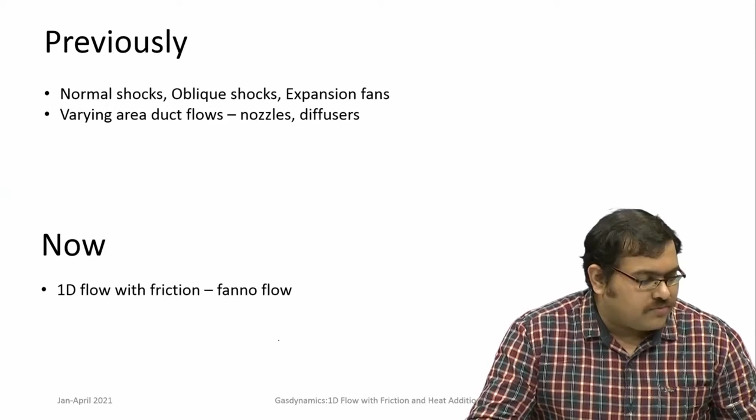Examples of these kinds of flows can be compressible flow through pipes, gaseous flows through pipes, and this analysis of the flow was done by Fanno, and it is also named Fanno flow. So 1D flow with friction, or Fanno flow. So what we are looking at is a constant area duct.

So first we would look at the thermodynamics of this process, and then we will move on to the flow equations and so on, and these are well described in very many textbooks of gas dynamics. So several thermodynamic charts and such figures will be taken directly from such textbooks.

Here we look at steady flow in constant area ducts. So A is constant, and we are considering flow friction due to viscous forces at the walls, and there is no heat transfer, so the flow is adiabatic. So 1D flow, uniform flow properties, that is the quasi 1D assumption, and the flow is adiabatic and steady. So friction always occurs in the opposite direction of the flow, it opposes the flow, and this is occurring along the wall.

So if you consider a pipe with circular cross section, the force of friction would occur on the lateral surface area. So for a small element dx, or it can be a typical length L, the lateral surface area is pi d multiplied by dx, and if the shear stress on the wall is tau w, then the force is tau w multiplied by pi d dx. So this force acts in the direction opposite to the flow.

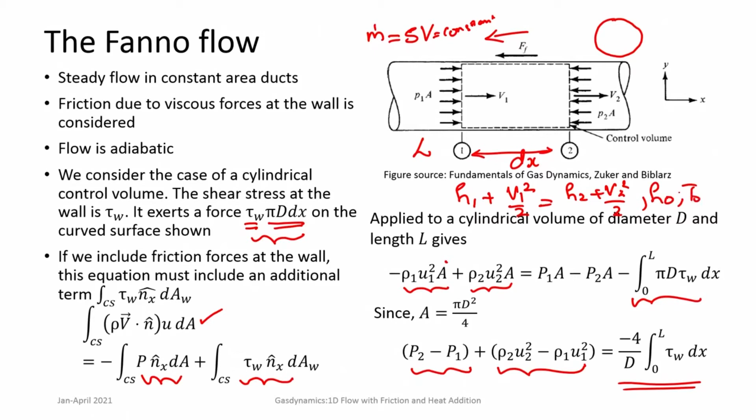So the major change that happens is in the momentum equation. What about the energy conservation equation? There is no heat transfer occurring over here. So if you take H1 plus V1 square by 2 is equal to H2 plus V2 square by 2, it essentially says total enthalpy or total temperature remains constant. So for Fanno flow, first what we shall do is look at the thermodynamic description of Fanno flow as a process and see what we can learn from this description.

In fact, almost all aspects of Fanno flow will be covered just by means of one single curve, which is the Fanno curve. How do we get to this curve? You consider two equations: the mass flux, rho v, is constant, and it is given a parameter g. This parameter g will come again and again in the descriptions. The other one is total enthalpy, h plus V square by 2, is a constant. So total enthalpy is a constant.

Given rho v equal to g, we can express v equal to g by rho, and this can be substituted in the energy equation, and we get h plus g square by 2 rho square is a constant. If you take this particular equation, it consists of only thermodynamic variables, along with the ideal gas equation of state and so on. If we plot all possible states beginning from an initial point which satisfies these conditions, such a curve is a Fanno curve.

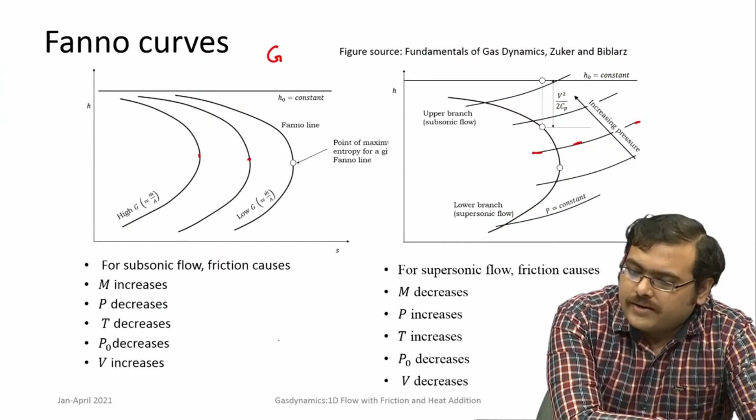And if you draw the pressure lines along the supersonic branch, then you will find that pressure will increase, and the corresponding height over here is essentially V squared by 2. So from that you are able to understand that in subsonic flow velocity actually increases in a Fanno flow as the flow goes through a long duct with friction, while in supersonic flow, if the initial velocity entering the duct is supersonic, the velocity decreases.

Okay. Now this is an adiabatic flow. So for adiabatic flow, H naught is constant, or T naught is constant. Also the other value that is constant is T star, that is the temperature at which it reaches Mach number equal to 1. So even T star is a constant. This particular point corresponds to T star, but please do not confuse it with isentropic flows. This is a flow in which there is friction. Friction always introduces entropy, that is why you see that entropy always increases and it reaches a maximum.

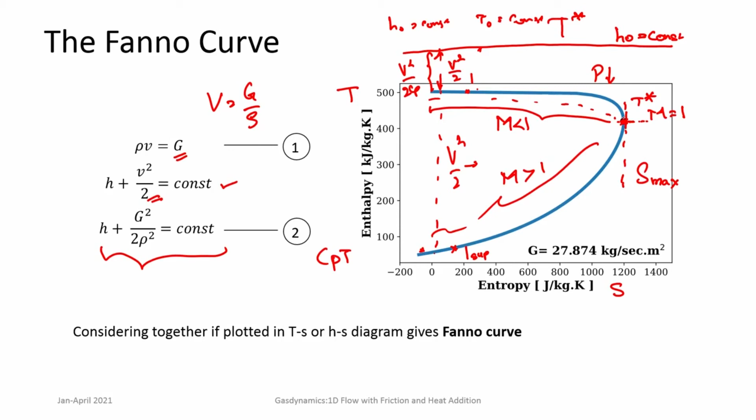So please bear that in mind and do not confuse between these two. Fanno flow is an entirely different flow where there is change in entropy, and entropy increases. That is an important point. So now we can completely distinguish between the upper branch, which is the subsonic branch, and the lower branch, which is the supersonic branch. In the subsonic branch, friction causes Mach number to increase, and pressure and temperature decrease. Density also decreases, velocity increases, and there is an increase in entropy.

Whenever there is increase in entropy and it is an adiabatic flow, the stagnation pressure will decrease. This is directly from our first fundamental principles, where we looked at the thermodynamics of the process and how stagnation pressure is related to entropy. So in an adiabatic flow, if there is increase in entropy, stagnation pressure will decrease. Stagnation pressure decreases across a shock, and it also decreases in the case of Fanno flows.

Now, what happens in supersonic flow? Friction causes Mach number to reduce, velocity also decreases, and pressure and temperature will increase. Consequently, you have increase in density as well, and P naught will decrease, because even in this case the entropy continues to increase along the supersonic branch.

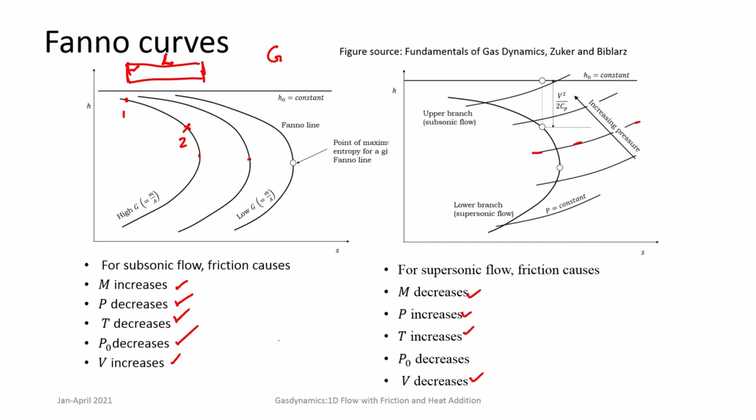Now, how we will get to these lengths, and what are the equations that will help us solve them for flow through pipes and so on, we will soon come to it. Here we are discussing thermodynamic aspects of Fanno flows, and just by means of a thermodynamic curve, HS or TS diagram, we can know all that is to know about this particular flow.

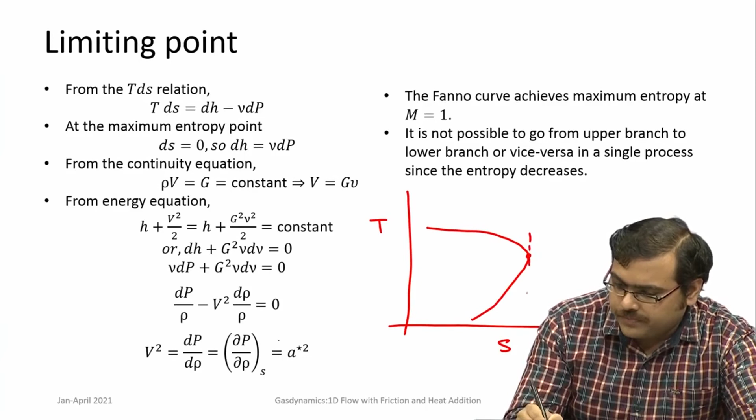Okay. Now, we have to look at that particular point where there is a maximum of entropy S max, and T naught is a constant. So, what is the condition at which S is equal to S max? Entropy is maximum. What is this particular condition? For this we look at the relation TdS equal to dH minus VdP. Here V is specific volume.

So, if you look at the neighborhood of a maximum entropy point, essentially it is a maximum, so dS should be equal to 0. This is a condition for maxima. So, if you put dS equal to 0, you get dH equal to VdP. And from continuity equation, or the definition of the mass flux, rho V is equal to G, and G is a constant. So, you can express V, the velocity, as G by rho, and 1 by rho is specific volume. So, it is Gv.

Then the other term which remains constant is the total enthalpy, H plus V square by 2. This V square is now written solely in terms of G and specific volume, H plus G square v square by 2 equal to constant, and differentiating this equation we get dH plus G square v dv equal to 0. Now dH is equal to vdP at the maximum entropy point. So now from here we can easily proceed.

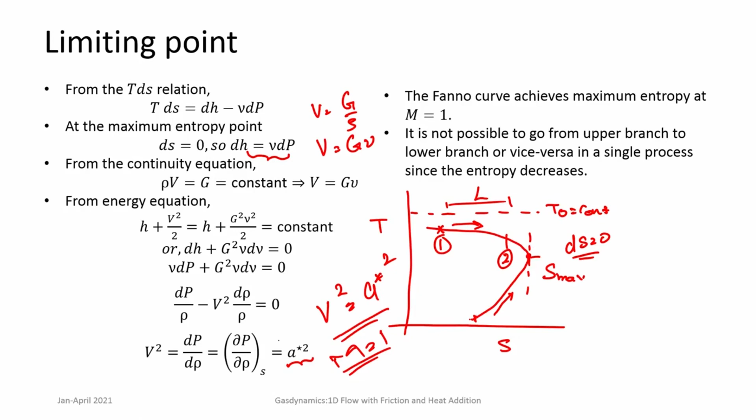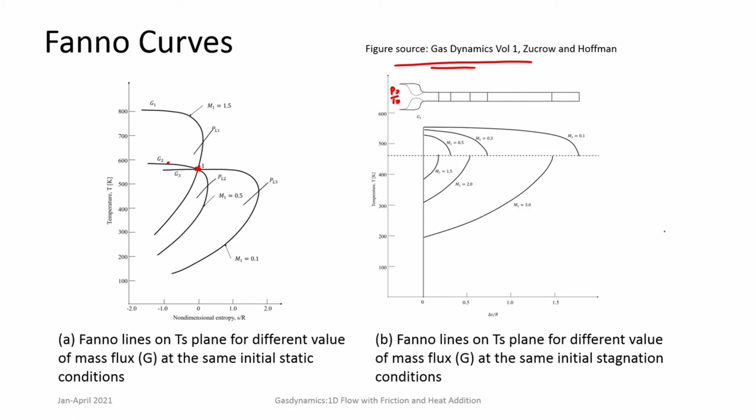While the curves on the right show different Fanno curves which start with the same stagnation conditions, but have different Mach numbers. So, consequently you have different Fanno curves over here. This is how it looks, and a general qualitative understanding of how to quickly draw a Fanno curve is very useful in understanding this topic and in solving problems also.

So, now we want to look at getting numbers, quantitatively understanding Fanno flow. When trying to do this, we did an initial integration, but we came up with this particular factor, 4 by D integral 0 to L tau w dx, because the shear stress in general varies along the x direction.

So, proceeding this way would be difficult. So, rather, under the 1D assumption itself with uniform flows, let us look at small lengths dx. From an integral kind of approach, we move towards looking at small control volumes with the length dx. We just have to look at the differential form.

So, on the left hand side you have dp plus d(rho v square), and this is equal to 4 by d tau dx. Now, rho v square can be differentiated, also considering the fact that rho v is a constant. So, dp plus rho v dv is equal to 4 by d tau (shear stress) dx.

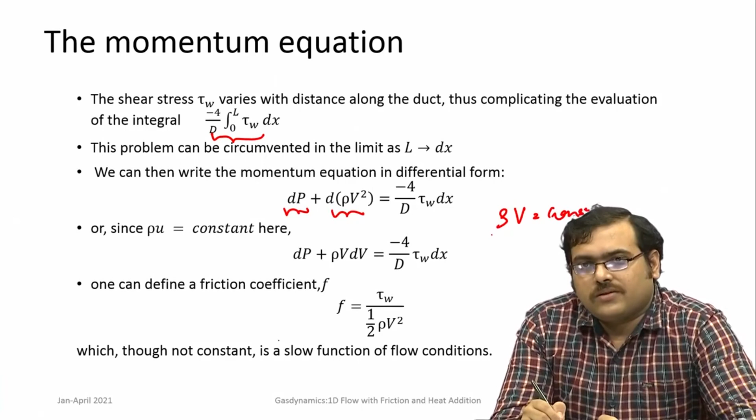Now, we need some way to express the shear stress on the wall. For this we take the definition of coefficient of friction, something we can easily borrow. Cf or f, the coefficient of friction, is tau wall by half rho v square. Usually f is not a constant, but it is a slow function of flow condition, so it does not vary very rapidly.

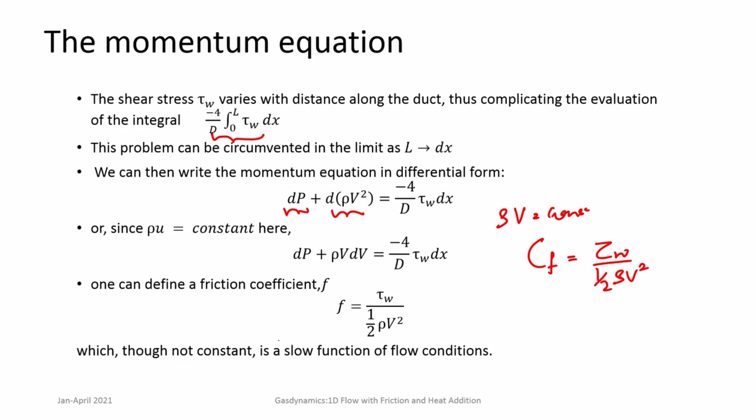So, if we put that in, we write this in terms of rho v square by 2 times 4 f prime by d. The term f prime is written because soon we will discuss there are two descriptions: coefficient of friction and friction factor. They are not the same. Coefficient of friction we represent by f prime, while friction factor is represented as f. We will soon come to it.

So, dp plus rho v dv is equal to minus rho v square by 2 times 4 f prime dx by d. Now this can be taken to the left hand side and taken together, and you get this particular equation. Since the coefficient of friction varies very slowly, you can consider an average coefficient of friction: f bar is equal to 1 by L integral from x1 to x2 of f dx, and consider that the average friction remains constant.

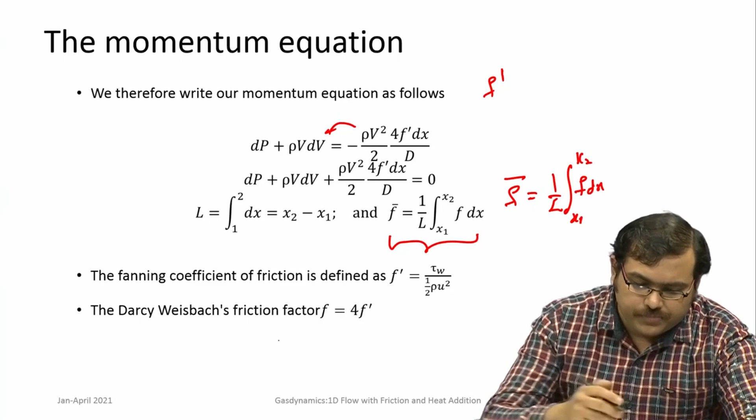This is what I was just mentioning: many literature sources describe friction in terms of the Fanning coefficient of friction, which is the definition of coefficient of friction itself, f prime. But in many places, particularly in pipe flows, the friction factor is given, which is f equals 4 f prime, 4 times Cf. So, look at the wording carefully in literature relevant to Fanno flows, whether they are talking about coefficient of friction or friction factor, and consider this multiplication factor correspondingly.

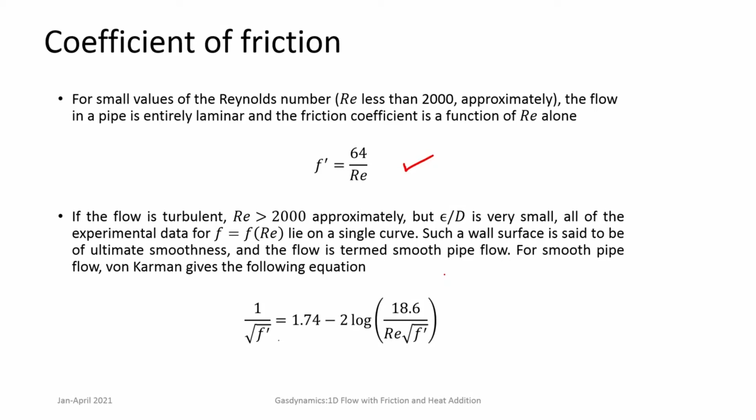But in general we are looking at an average coefficient of friction which remains constant. Now, what about this coefficient? We need to know it. For this we can look at several correlations available for laminar and turbulent flows. For laminar flow, of course, this is 64 by Reynolds number, and for turbulent flows there are various descriptions. For a smooth wall, this is the particular equation, while for walls with certain roughnesses we have different equations. A suitable equation can be chosen.

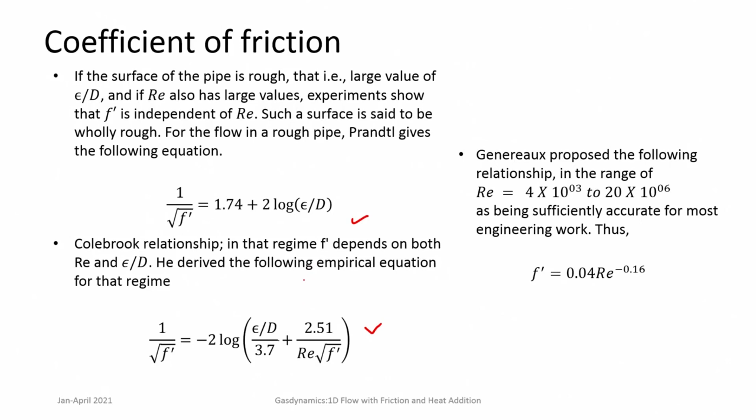Also, a common chart depicting all the variations of friction factor or friction coefficient is the Moody chart, where you have laminar flow and turbulent flows for different surface roughnesses, because turbulent flows are affected by surface roughness. If one is using an approach where it can be evaluated analytically, we can use such analytical relations to get the coefficient of friction. Or if one is using calculators and charts, then Moody's chart is available.

But when we look at these problems of friction flow through pipes, generally f would be given and then we would solve the equation. That is how most textbook problems are given. For applications you can refer to these charts.

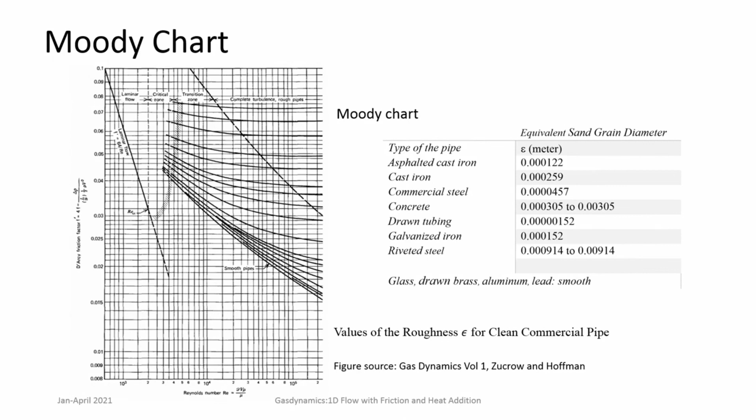So now we understood in a qualitative sense what is happening in Fanno flows, and there are differences in how the flow behaves in subsonic and supersonic flow, with Mach number equal to 1 being the critical point where entropy is maximum. In the next class we will look at getting equations in terms of Mach number, so that pressures, temperatures, and change of Mach number can be evaluated in a flow through a constant area duct with friction.